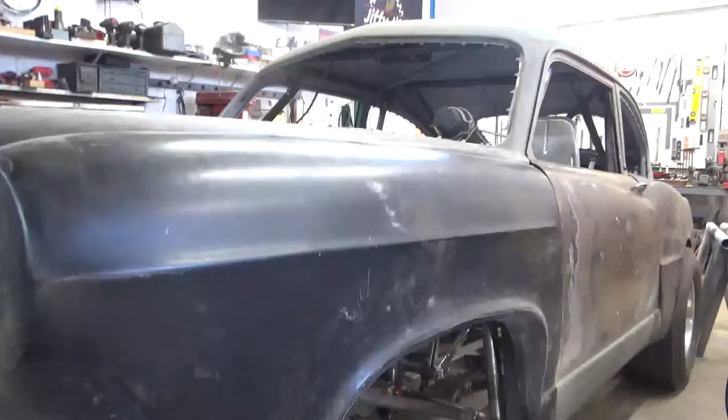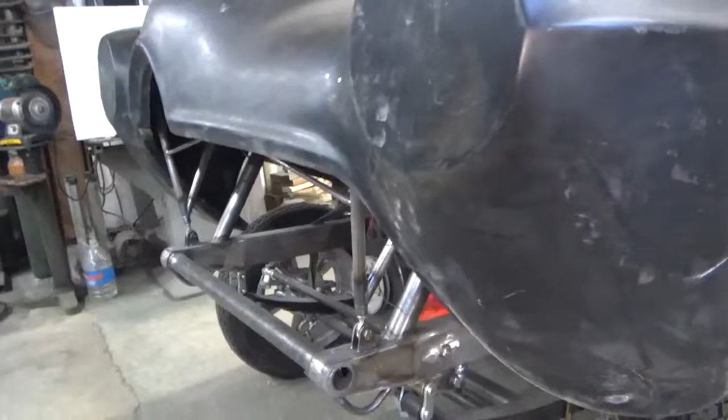Okay, this is the front end from the Henry J. It rolls pretty much ready for tin work, wheel tubs and tin work. You have to pardon me for having the front end on it and everything else. I wanted to get it all mounted, waiting on a radiator yet, but I wanted to talk about some of the things that I do. And part of the reason I do it is because it just makes it simple.

You'll notice in the front, I typically put my shackles in the front. That's because if you use like a Corvair box and side steering, it wants to push the shackle forwards and backwards when you turn the car, and it'll move the wheelbase of the car. This one has cross steering, Vega style box, which I'll show you some of the things on that.

But I use the Speedway spring kits. It's like a 28-inch spring. I use their bolts and their perches. I make my own axles. I like a heavier wall axle, 2-inch diameter. 1/4-inch wall axle works pretty good. You have to deal with what you can get. WAC makes some really nice axles. I've heard of guys bending the Speedway stuff, but you pop giant wheelies, you're going to bend about anything. So this uses the early Ford spindles that we buy aftermarket.

You can see them. The brake kit's not on it yet because it's not finished. The leaf springs, I told you those are 28 inches from Speedway, like their gasser springs. Typically with these type of cars, you'll end up taking a leaf or two out of them to make them work right. These things are trailer springs basically, I believe, and they're stiffer than all get out. Even though this car has a big block in it, I guarantee it's probably going to at least need the little leaf taken out of it.

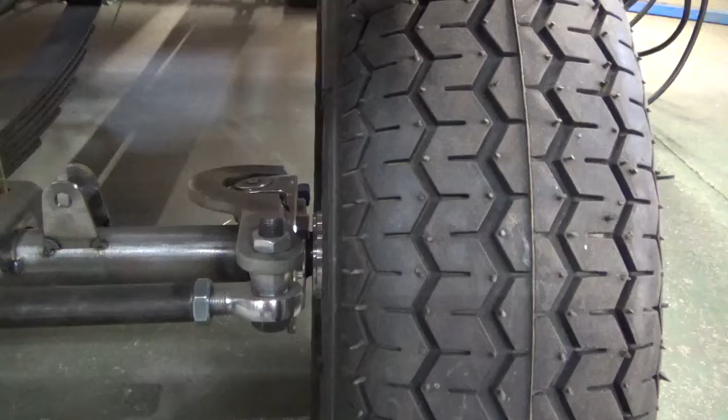One of the other things I'll want you to notice here quick, early Ford spindles. If you look at my steering arm, I've redesigned this so that I can get some Ackermann into this car. Notice that the pivot for the steering arm, which the Heim joint is bolted to, is closer to the wheel than the kingpin center line. That's to try to get some Ackermann, and I've tried to get it as close as I could to a rotor. What Ackermann is, it causes the car, when you turn, to have differing turning radius on each wheel, so you're not scuffing the tires. I'll show you a picture of that.

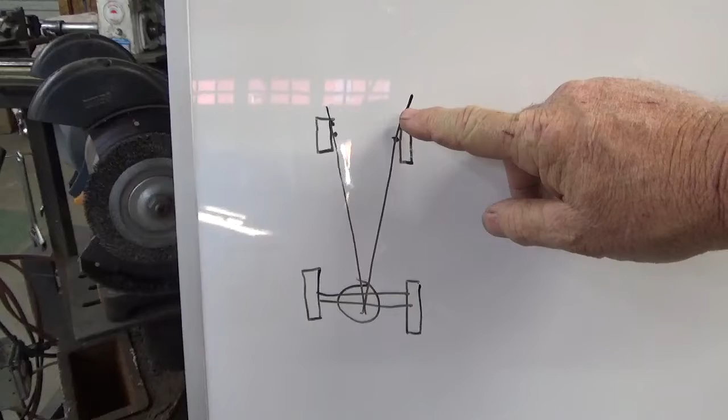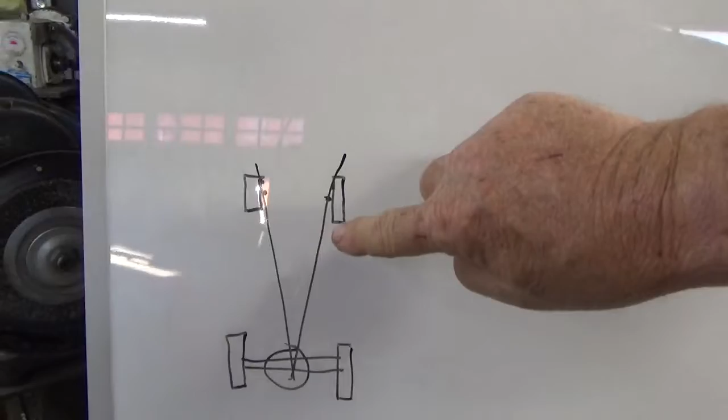Basically, if you're looking for good Ackermann, I'm using a whiteboard, so we're getting high tech. The kingpin center line, and then the point of the steering arm is out farther, and what you're trying to do is get that line to line up with the center line of the rear axle, and that's what creates Ackermann. So when you turn a corner, say if you're turning this way, the radius that this wheel turns will be tighter than the radius this wheel turns, and keeps it from scrubbing one of the tires and losing road contact. Because if you're scrubbing a tire, you don't have any road contact or any traction with the front wheels.

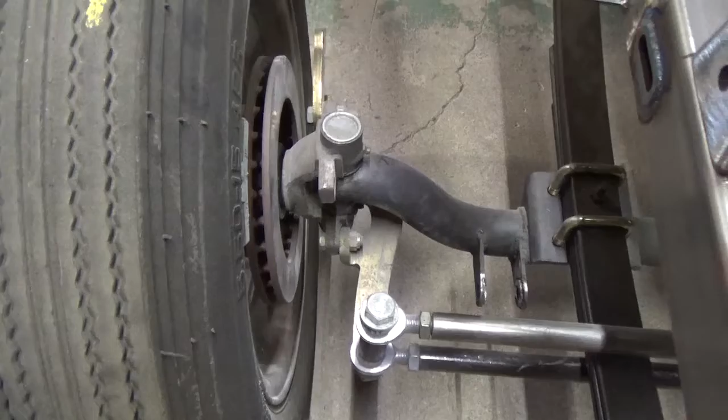So I'll show you a little bit on this Falcon. It's done too, and this has Speedway Motors steering arms. And if you'll notice, they're farther inboard from the spindle center line. So the Ackermann on this one's actually backwards. So it's going to turn wrong, but it's what was on the car.

I mean, this works better for rear steer stuff. But when you start running the motor where it's supposed to be, it ends up running into the corner of the oil pan, which is not good. You don't need that. Or you got to slide the motor back in the middle of the car, which is dumb. So I typically do everything front steer like this.

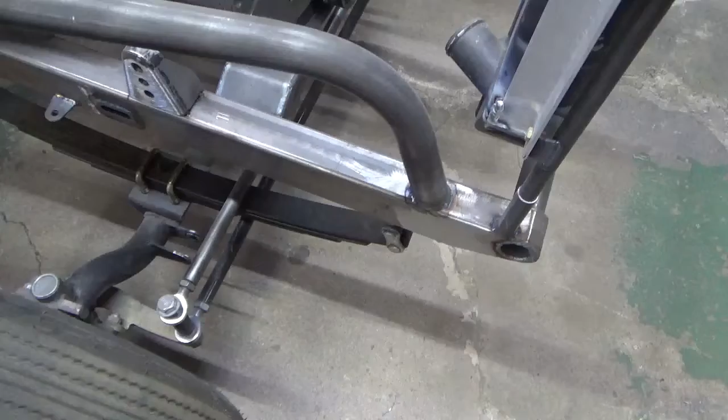And this one has a Corvair box on it too, as you can see. Like I say, this all came on this car. The springs, all of it was done. Fortunately, it's got enough caster in it to work, but you can shim the axle to get caster.

Typically, when I'm setting these things up, 10 degrees of caster minimum, 10 to 12 on a straight axle like this. On an A-arm front end race car, I'll build 6 degrees of caster in it, but these things here need 10 to 12 degrees to go straight at speed. So okay, we've looked at that.

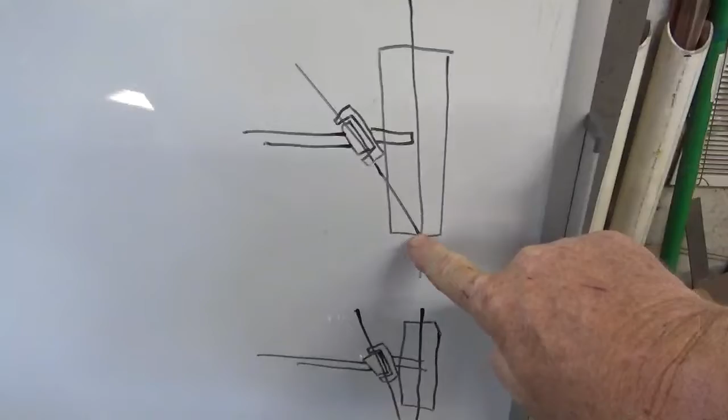The next thing I want to talk about is scrub angle. We'll get back here in a Henry J, and you'll notice from a distance you can see where the center of the tire is, and you can also try to draw an imaginary line through the kingpin center line. What's supposed to happen, I'll show you on my whiteboard, is that's called a scrub angle. In theory, when Ford designed these, the scrub angle intersected with the center of the tire. What that means is it turns on the radius of the kingpin.

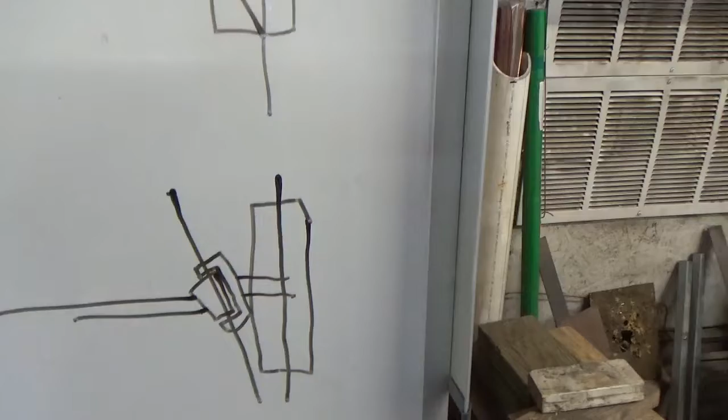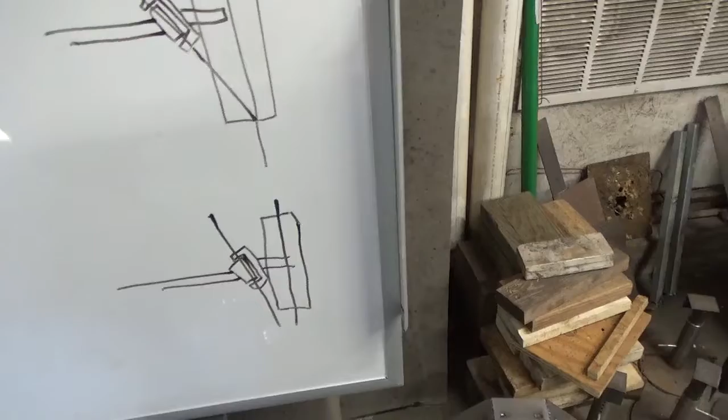Well, with all the aftermarket brakes and different offset wheels and everything, we end up with a scrub angle like this, where the two lines don't intersect at the center point of the tire, which is not great. Will the thing go? Yeah, but inherently, sometimes that will cause some death wobble. It's just inherent in some cars worse than others, but I can explain to you how to avoid some of that stuff.

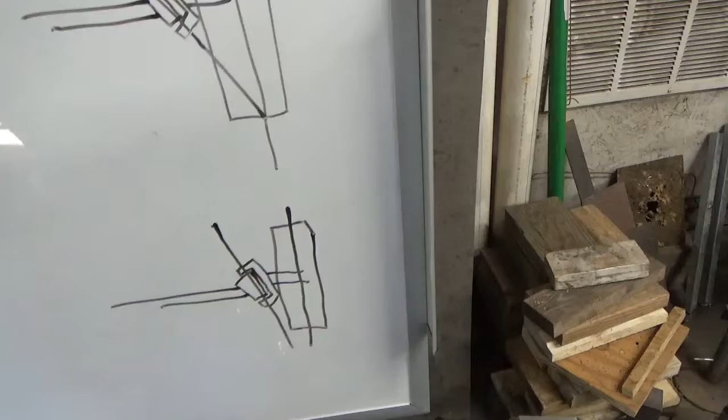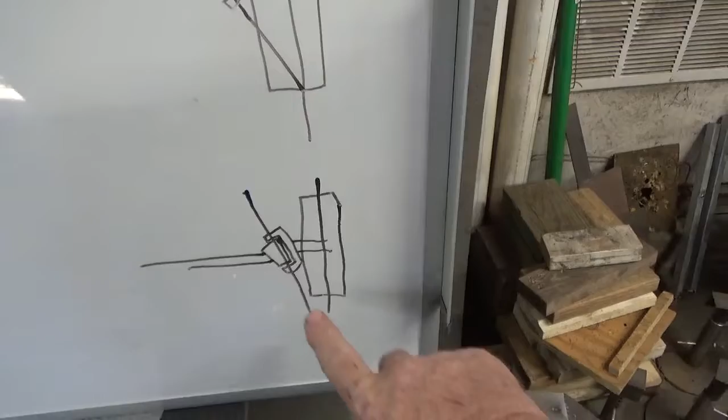A deeper wheel that sets over the top of the spindle is a good idea here. There's some of those wheels out there that got a real wide offset, and something that slides back over the hub farther to try to reduce this angle helps a lot. Some guys don't think so, but I know for a fact it helps. Okay.

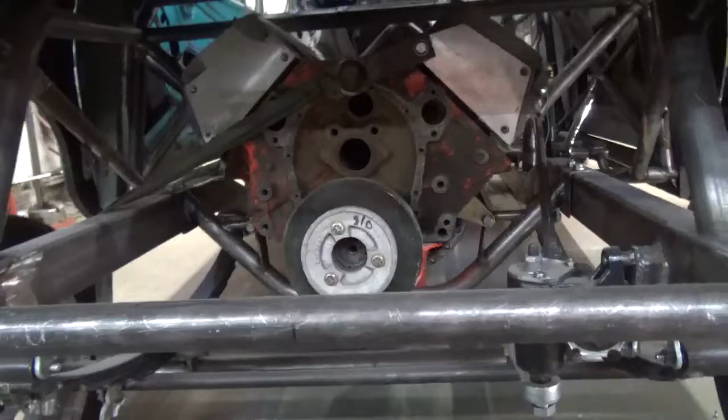Parallelism on steering arms. I found this to be super key. If you'll notice on this car, the drag link, this rod here, is going uphill to the steering box a little bit. That's because this car is not fully loaded.

When this car is finished and fully loaded, I will make sure that that drag link is parallel with the tie rod, so that as it moves through its suspension travel, that steering rod travels at basically the same angle as the tie rod. So you want those to be parallel or as close as you can.

And that goes the same when you're running a Corvair box and side steering. When you got the arm on the side and it's pushing forwards and backwards, that thing needs to be parallel with the ground when the car's done. That's super important. This one here, you'll notice I'm pretty close with my bolt right there to the tie rod, but when I'm done I'll have a ton of room. It'll all be okay.

Like I say, this one has a Vega style box, but it's got a straight steering arm. Typically I like to use a dropped arm where I can raise the box up higher in the frame. It ends up putting the drag link in the same spot, but it just raises the steering up a little bit, and I'll show you on the Falcon when I'm talking about that.

On this car over here, it's all built about the same way. You can look this way and you can see that the drag link and the tie rod are parallel with each other. And this one has a drop steering arm, so I raised the box up on the frame rail higher, which I like this mount better. Customer supplied stuff on both cars.

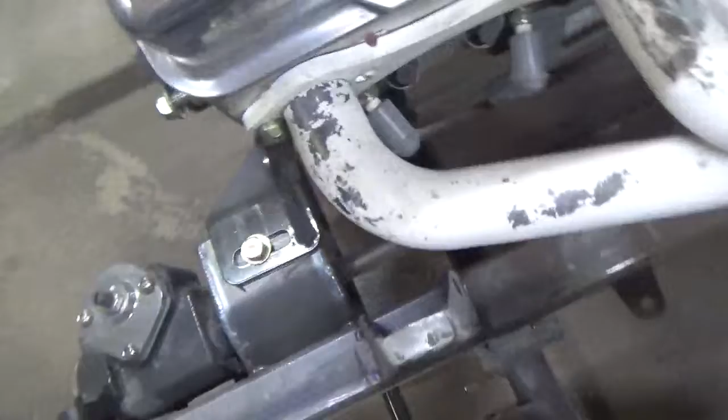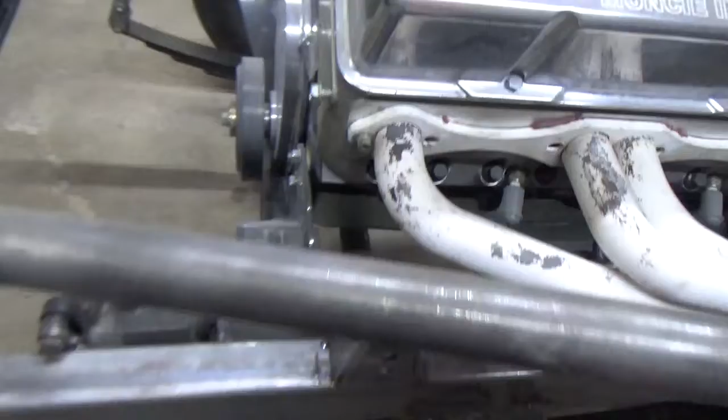But as you can see, I had to run my steering shaft through the motor mount because we used a front style mount and everything else, so that got a little tricky, but we still made it work. This car's got a little bit different mount for shocks, but all in all it's the same exact shock I use on these things.

As I said before, don't like those steering arms, but it's what we got. In my Chevy too, it's got the same thing on it. It drives okay. I've run into steering wobble with it once before, but that was because I bounced it down one time. I was headed for the wall, so I was in a wheelie, bounced it down, and it wasn't happy. But she drives okay. That car goes, you know, it'll go 8.60s.

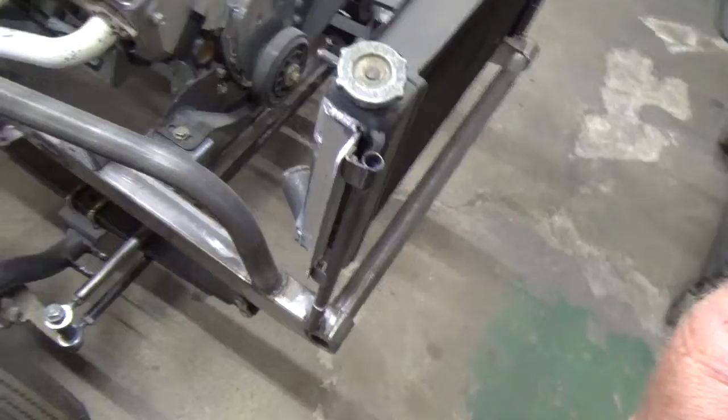So, like I say, drag link, tie rod, parallel, super important. One thing I don't like about this car is when it came, it had that spacer in there between the steering arm and that's a good way to bend steering arms. But on this car, I don't quite know how to do it without putting a third arm on it. And I may do that, just put an arm on the top so that I'm taking that spacer out of there. This thing here, I've used little aluminum cone spacers to get everything to clear.

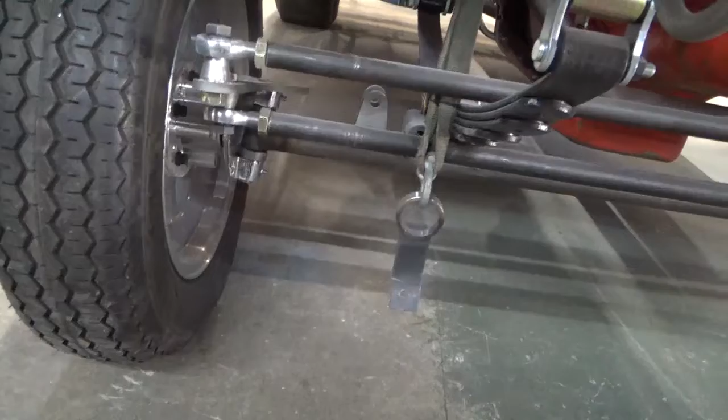You can see how I did this car here. Works a little bit better, and my steering arms are on the top of this one. So, like I say, I may roll all that stuff around on that car and get it fixed.

When I'm doing this, like the drag link and everything, I try to figure out where half travel is going to be so that the drag link is swinging through an even radius. I'm not starting at the one end of the radius and swinging down, because when you start doing that, as I said before, make that parallel with the ground, you jack up the front end, the steering box stays still, it's going to turn the wheels one way or another.

Had that happen on a friend's car. It was a Corvair style box, the radius rod came uphill about 20 degrees. Well, you jack the front end of the car up and the wheels would turn to the left, I think they were turning about 3 or 4 inches. So, you know, it's like you're trying to head for the guardrail, and when the thing came down and the wheels weren't pointing straight, it went into death wobble like crazy.

All we did is change the steering arm on the spindle to level out that drag link, solved all the problems, and added some weight to the back of the car. But all in all, front suspension stuff, that's about what I do.

Mostly everything I build, I use the Wilwood front brakes. I like them. Speedway Motors sells a T-bucket kit that fits on these early Ford spindles with a solid rotor. I like using those. For drag racing, a solid steel rotor is a lot better than a cast iron rotor, because when you run a cast iron rotor and you overheat it, it can crack and fracture, where a steel rotor won't do that. It'll just warp. It'll still stop you, but they'll warp. They won't break apart, whereas a cast iron rotor will.

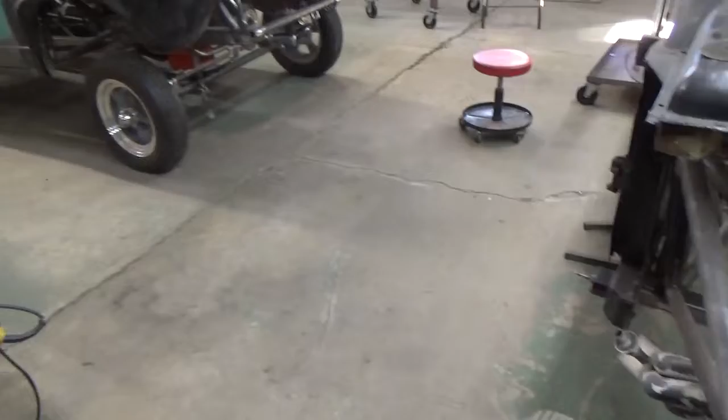And as you'll notice too, this has got a Chevy spindle on it, with those Speedway Motors conversion Chevy spindles, which it doesn't matter what you want to run, Chevy or Ford. I just know that the Ford spindle is easier to get a brake for than the Chevy spindle. The Chevy spindle, they only offer a vented rotor kit, and it's great for street rods or slower cars, but when you start going real fast in these things, cast iron rotors ain't the way to fly. So I thought I'd share this stuff with you.

And the other thing that I do like about the Wilwood stuff is this dual bolt pattern, 4.5 and 4 3/4 bolt circles, so you can put any wheel on the front of it you want. These things here come 4.5, and if you want to change it, you've got to have them re-drilled, which is a pain in the butt and not super safe. But anyways, that's what's going on.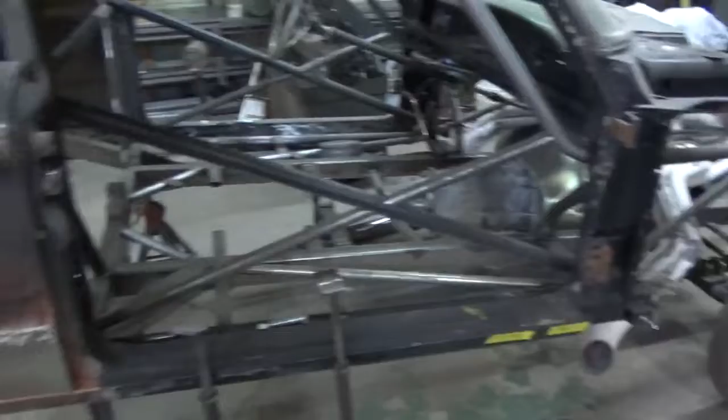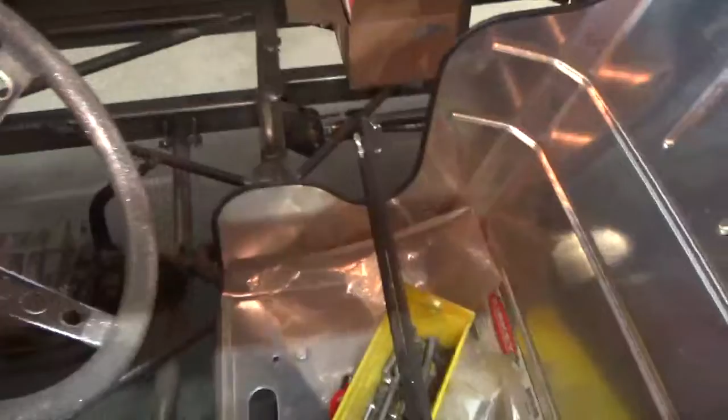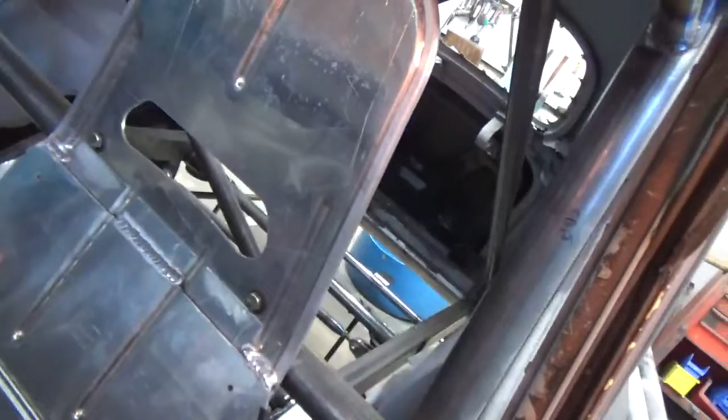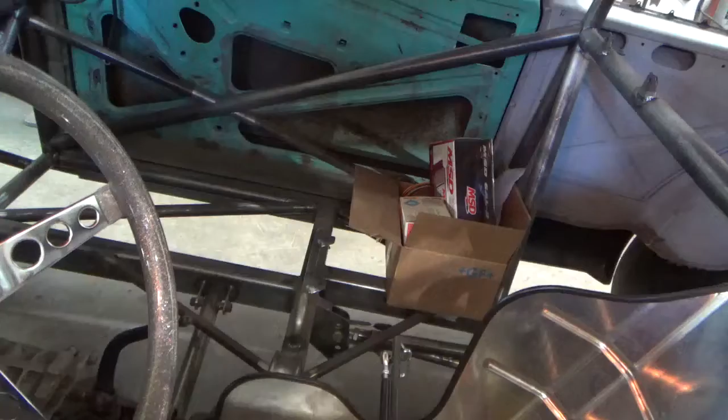The Falcon, I'm repairing a quarter panel so we can get it off. I can finish weld it and do the tin work. Like I say, the Henry J is about done. Show you a little progress here if you can see it. Interior's in it. Well, I should say interior. Steering, pedals, all that stuff's done in this car. Mounted two seats. Fuel cell's done. Electrical disconnect. All of it's pretty much whipped. We've got to bend the shifter handle over a little bit, but this one's ready for tin work. We're gonna get that going here quick as soon as I get my 55 out of the way.

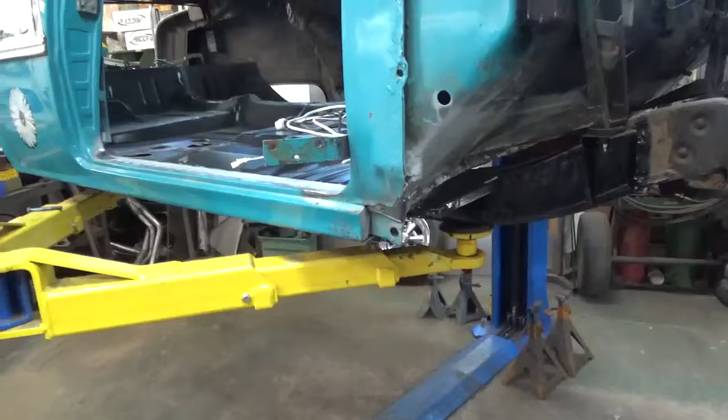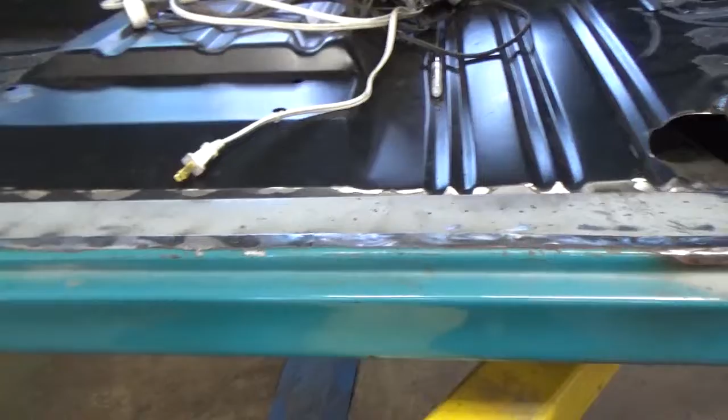I like doing tin work on the lift because I don't have to bend over and lay on my back anymore, and this thing's in the way. But I am making progress. Floors are in it. I started working on repairing the rockers. I got the top of this rocker put in. The toe boards are put in. Just working my way to the back. I got my tubs tacked together, my wheel tubs. I made a set of 18 gauge wheel tubs for this thing. Put them in, and it'll have a fuel cell in the back and everything else.

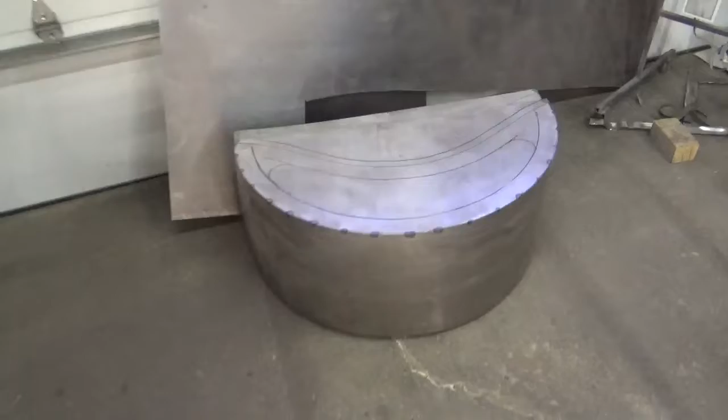I'll show you the wheel tubs real quick. They're laying over here. I haven't finished welding them yet, but when you build 18 gauge wheel tubs like this, the stones don't beat them out. They're pretty tough. A little harder to work with 18 gauge, but they don't get beat out of the car. Like this Falcon, they brought me a set of Competition Engineering wheel tubs. They're 22 gauge, sort of like working with thick tin foil, but that's what they got.

So anyways, hopefully my front end information has helped a little bit. I wanted to share that with you guys and show you what was going on. And hopefully I can get to the point where I can answer some questions and stuff like that.